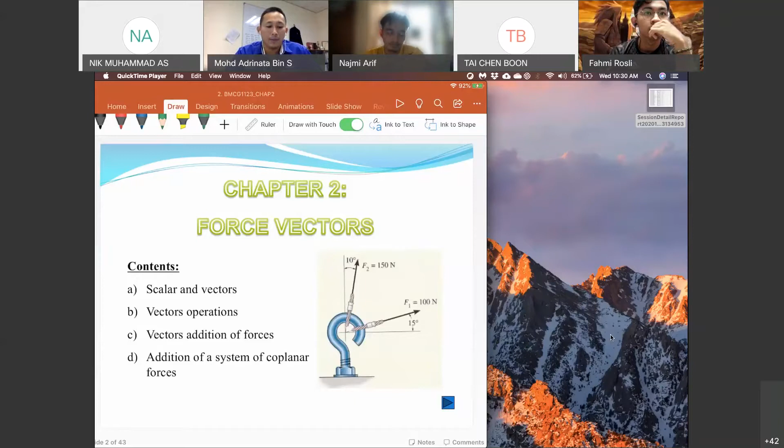Okay. Application of vector addition. You need to add the forces. Okay, there are 4 concurrent cable forces acting on the bracket. So this is our bracket. So this is 1, this is 2, 3, and 4. There are 4 concurrent cables. So there are 4 cables acting on the bracket.

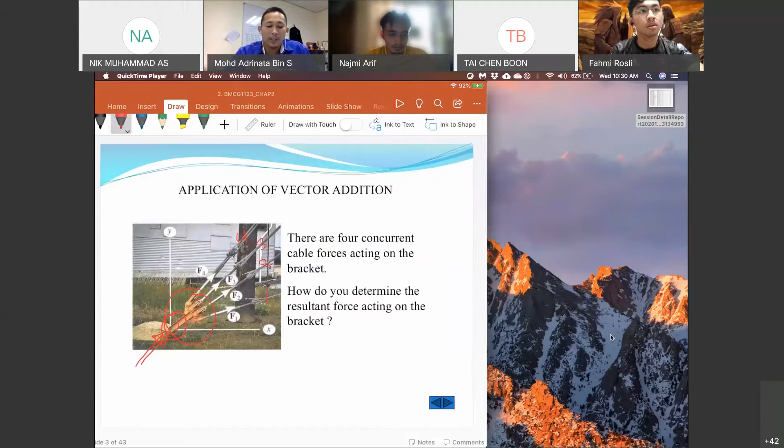How do you determine the resultant force acting on the bracket? So what happened here? What happened to the end of the bracket? So you need to calculate what is the force reaction at the end of the bracket.

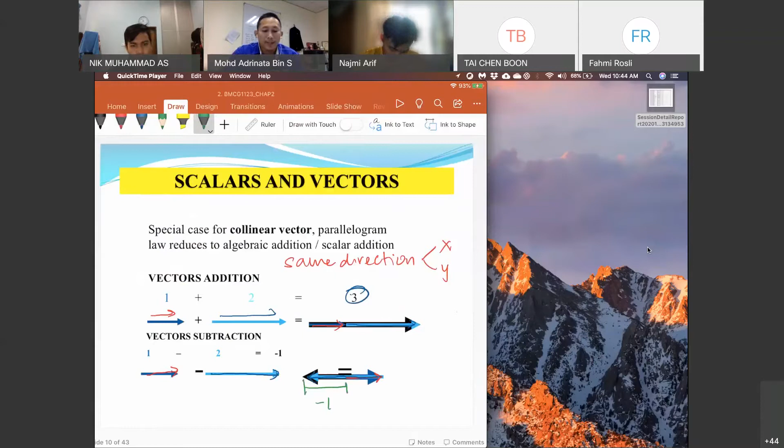Okay, adding, subtraction. Okay, so for vector subtraction, we will look at vector subtraction. Before this, you have A and B with a positive direction, but what if you have A minus B? Okay, so if you have A minus B, then you need to use this as the negative direction. A minus B. So at the end of tail A, minus B. So this is the resultant force. Okay. Any question?

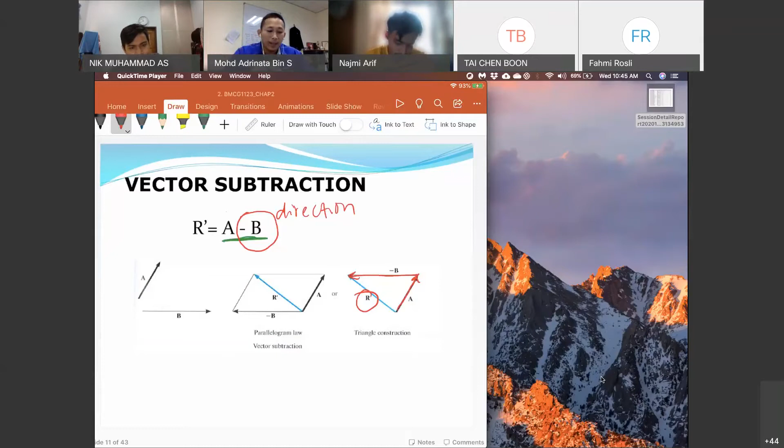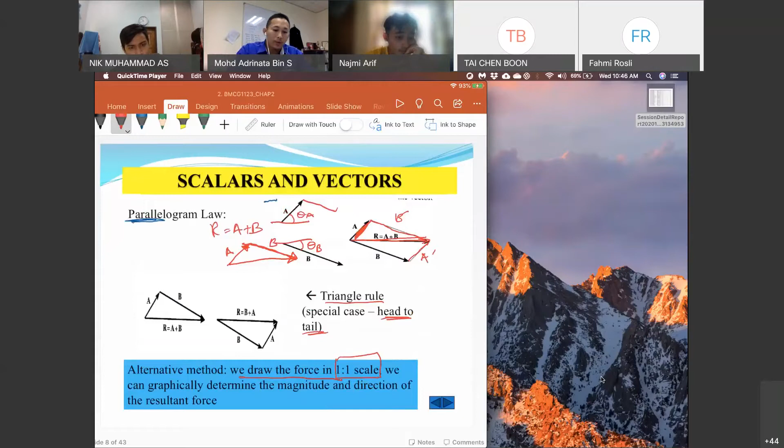Vector addition of forces. So this one is easy, parallelogram, and then you can use addition with head to tail. Okay, this one, head to tail. Okay, so head to tail. So this is the first strategy. Vector addition of forces, finding resultant forces.

Two component forces acting on a point can be added together to form resultant forces. Two components acting on a point can be added together. So this is like A, B, this is a point, can be added together to form a resultant. Just now using parallelogram, okay, using parallelogram. So this is the resultant. Okay.

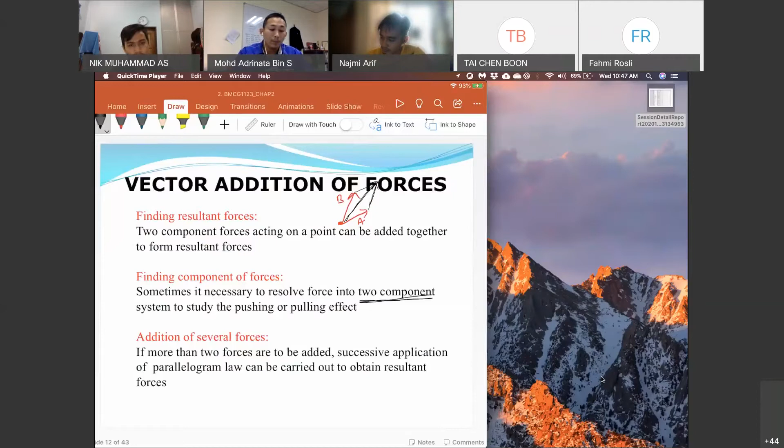Finding components of forces. Sometimes it is necessary to resolve a force into two components to study the pushing or pulling effect. So this one is divided into two components. Addition of several forces. If more than two forces are to be added, successive application of the parallelogram law can be carried out to obtain the resultant force. So this is a parallelogram. Resolution of a vector is breaking up a vector into components. So you need to break it, divide it into two components. It is kind of like using the parallelogram law in reverse, also known as finding components of forces.

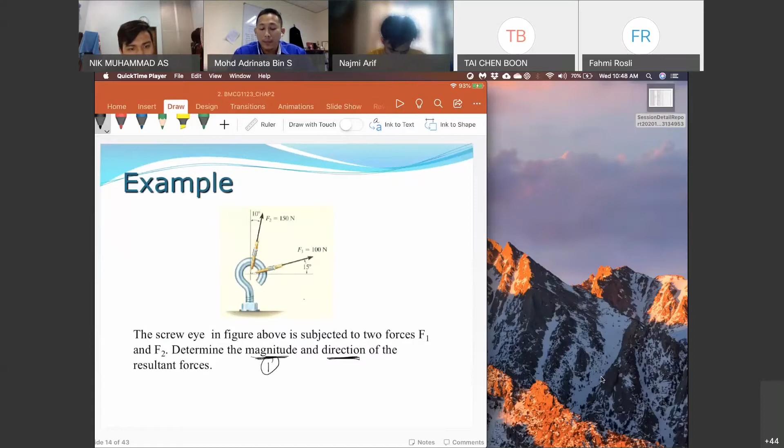Magnitude, 1 mark. Magnitude is the value of adding 100 plus 150, but it is not easy like that. You need to break it into X and Y axis and so on using the steps. Direction, 1 mark, so direction should be in theta. Value, magnitude, forces using Newton. So this is what you need to remember. There are two things in your results you need to mention: Newton and theta. Okay, both.

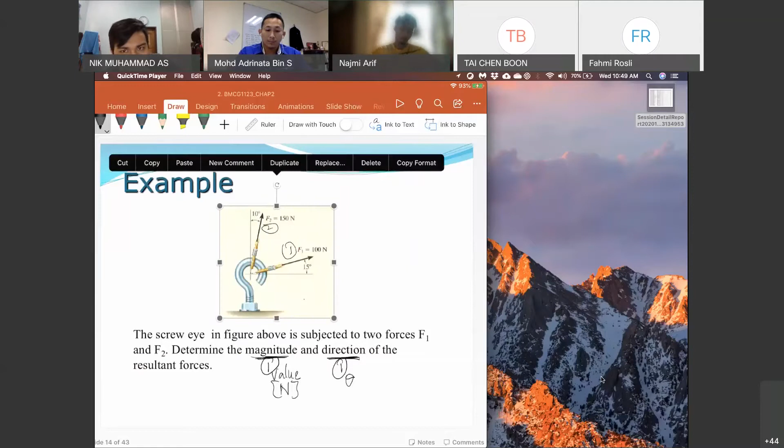Okay, so how are we going to solve this problem using our parallelogram? Draw a line from head of F1. This is F1, number 1. This is F2, number 2. With theta 15 degrees, F2 10 degrees. So, okay, draw a line from head of F1 that is parallel to F2. Draw another line from head of F2 that is parallel to F1. The resultant force extends to where the lines intersect at point A.

So for the parallelogram, they ask: from head of F1, draw F2. From head of F2, draw F1. So let's say like that. The resultant force Fr extends to where the lines intersect. Intersect means meet, here. Need to find the magnitude of Fr and the angle direction. This is what I said: number 1, 1 mark, number 2, 2 marks. What is the value of the magnitude, and then what is the value of theta?

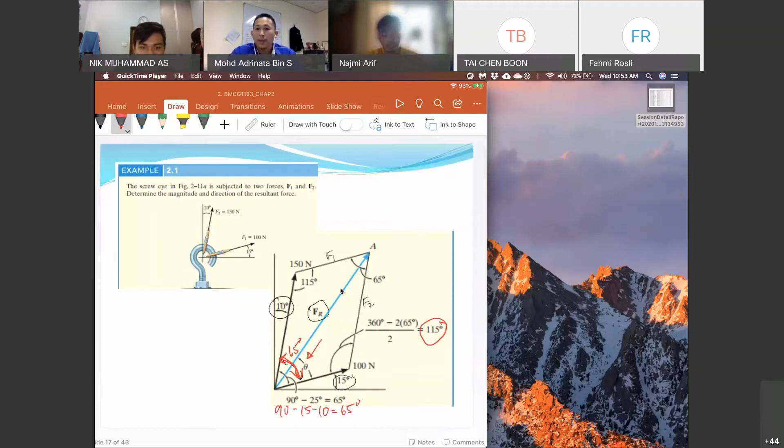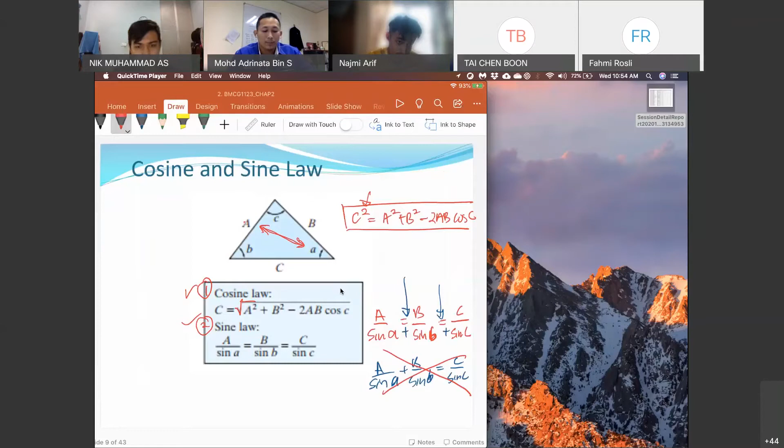So you need to calculate the resultant force Fr. Cosine law: A, B, C. Then we have the theta, which is opposite in the triangle. We have A squared equals B squared plus C squared minus 2BC cosine A. So you need to define which is A, which is B, which is C. That is how you define your triangle. This one should be A, this one should be C, this one should be B. Then you can solve this one. This is cosine law.

Okay, so from the calculation and from the triangle, we get that our resultant force is 213 Newton. It shows that our force 100 cannot be added to 150 to give a resultant force of 250. It cannot be like that. You need to find your triangle, find your theta, then you can get your resultant force. And then you need to find theta. B is theta, phi is from the x direction.

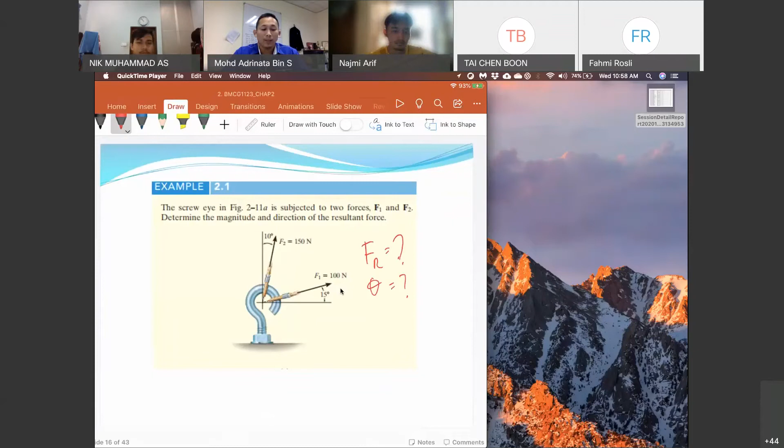If the magnitude of the resultant force is to be 500 Newton. This is a normal question. In our class we teach you: if we have 100 Newton F1, 150 Newton F2, what is Fr and what is theta? But in this question, we give you Fr. What is F? Fr is 500 Newton, directed along the positive y-axis. So theta is 90 degrees. Determine the magnitude of force F and its direction theta. So find F and find theta.

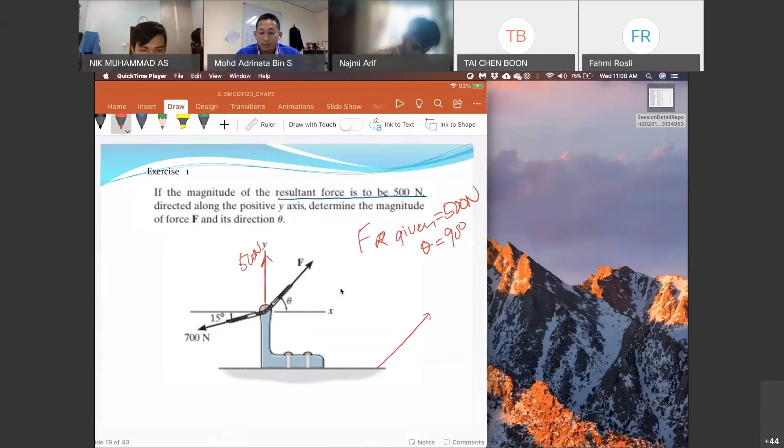So from the parallelogram, you can draw this one, F. F is actually unknown. But you have your 500 Newton, this is Fr, and then you have 700 Newton with 15 degrees. So you need to find your F and then you need to find your theta using your parallelogram.

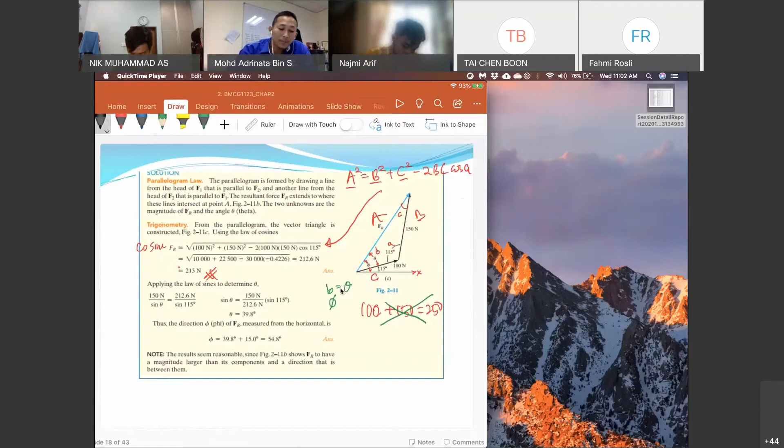Okay. So this is parallelogram. So I hope that you can do it by yourself. Then we have our next example. So we need to do step 1 and 2, or 1 is enough as long as C can be found. 1 is enough if you can get your C. Okay, 1 is enough. This one, this is the additional if you want to find another in the questions. You need to find more.

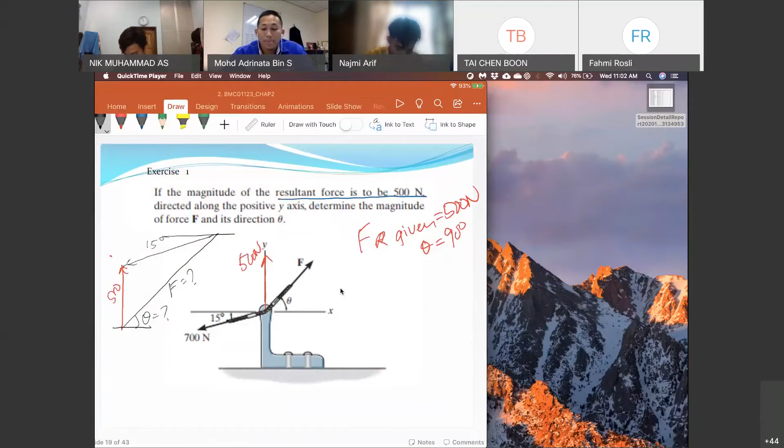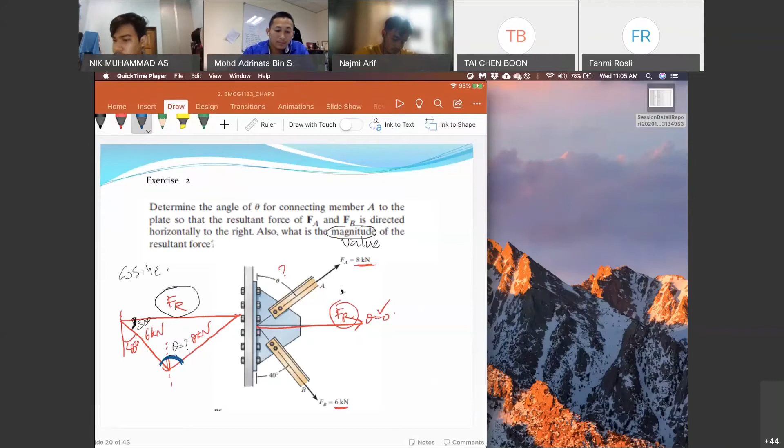Then after you get FR, you can calculate your theta, this one, using sine law. Okay. This is the answer given. FR you got 10.4 kilonewton. Using this method, you got your FR resultant force is 10.4 kilonewton, and also theta is 54.9 degree. Okay, if you are using sine law, you will got this theta. I say it phi. Let's say this one is phi is equals to 94.9. Okay, this is what I said yesterday.

You need to use your trigonometry knowledge. You need to deduct this one. This one is the same, 40 degree. Okay, so you need this answer. You need this theta. If you answer theta is equal to 94.9, wrong. Okay, so be very careful when you answer, and please check it back after you solve the questions. Okay. So for this parallelogram, you need to use cosine law, you need to use sine law, and you need to understand how do we transfer the angle, the theta. Okay.

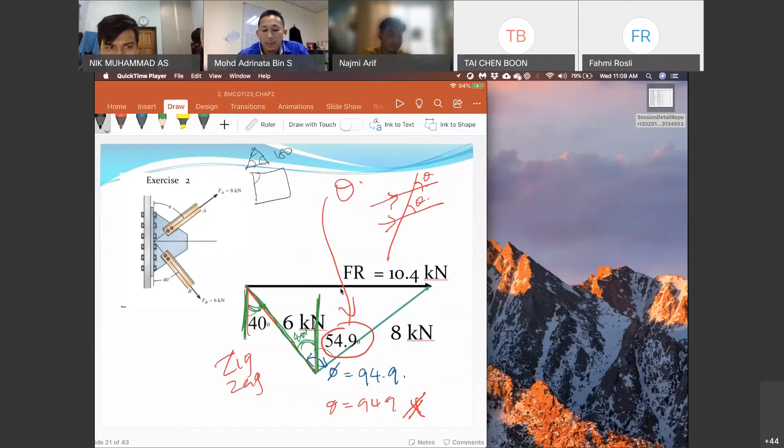So this is, I call it as a zigzag, this one, zigzag. Okay, to transfer 40. This is parallel. So this one is the same. So theta is the same theta. So sometimes you need to use this one also. Okay, and sometimes you need to calculate there are triangle. What is the total angle of the triangle? Total internal angle. So A plus B plus C equals to 180. Okay, for square, A, B, C, D is equals to 360.

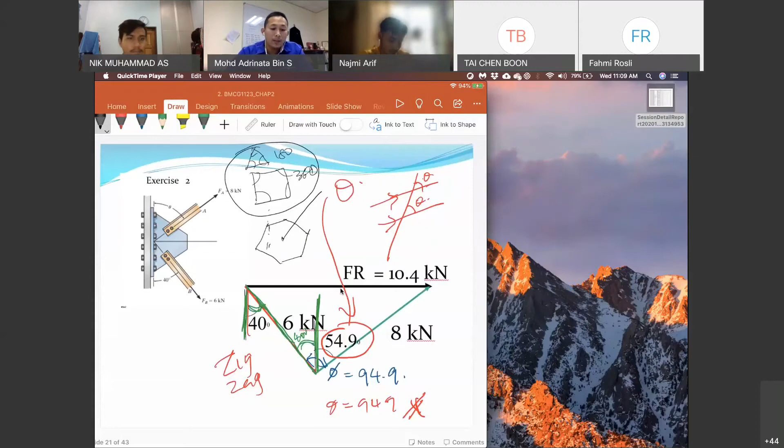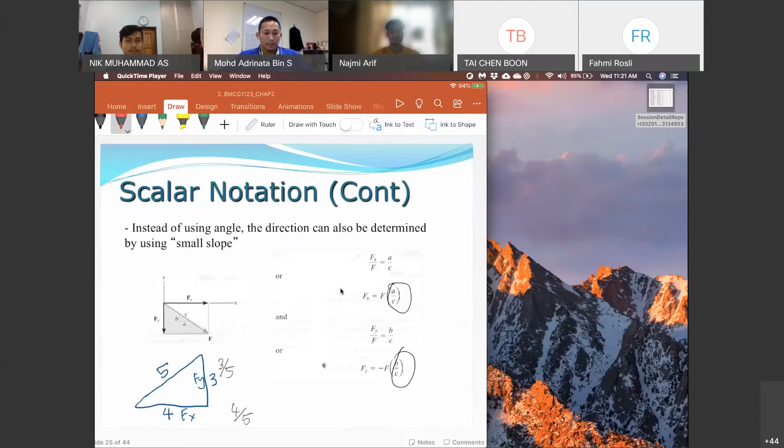Now, I'm explaining Cartesian vector. Okay, we have Cartesian vector, and then we have the examples. Cartesian vector: we resolve vectors into components using x and y axis. It's the same, x and y axis. Each component of the vector is shown as a magnitude and a direction, without using theta. So the direction is based on the x and y axis. We use the unit vectors i and j. Okay, so i for x, j for y.

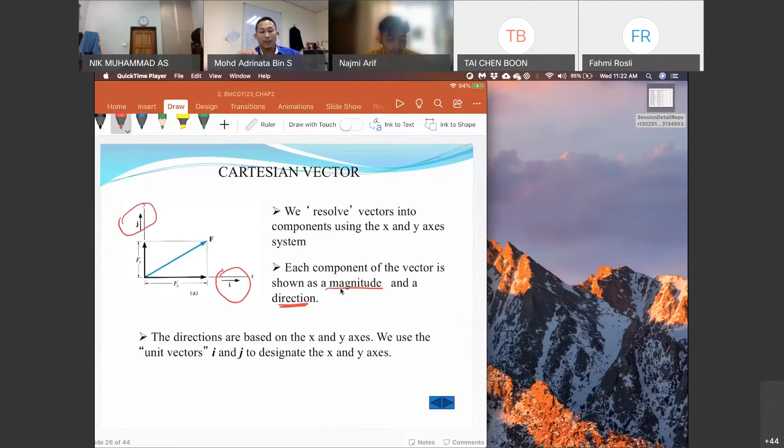This is the example of Cartesian vector, which is the resultant force that you have given. Before this, from the questions, you have F1 equals to 100 Newton with theta is 15 degree. Instead of mentioning F1 is 100 Newton with theta, they write it as F1 equals to, let's say this one is 95 in I direction, this one is 10 in J direction. So you need to calculate actually, but I just use an example. So F1 is equals to 95I plus 10J. Instead of giving you 100 Newton with theta, they can write it as 95I plus 10J. So you actually need to find the F1 and also the theta.

It's the same. So the X and Y axes are always perpendicular to each other. Together they can be directed at any inclination, so you can move the origin. You can move the origin to answer depends on your question. Sometimes the question is moving downward of the slope, so you can change your X and Y direction using theta of the slope. So this is origin and this is the same origin, but you need to make sure that X and Y is perpendicular. What is perpendicular? 90 degree. Always 90 degree X and Y.

So before this, we have our parallelogram, and then we have our trigonometry, Fx cos theta, Fy sin theta, and then now we have Cartesian coordinates.

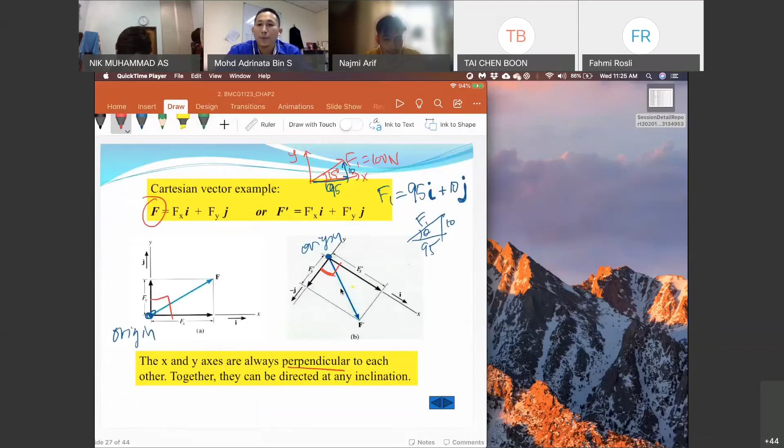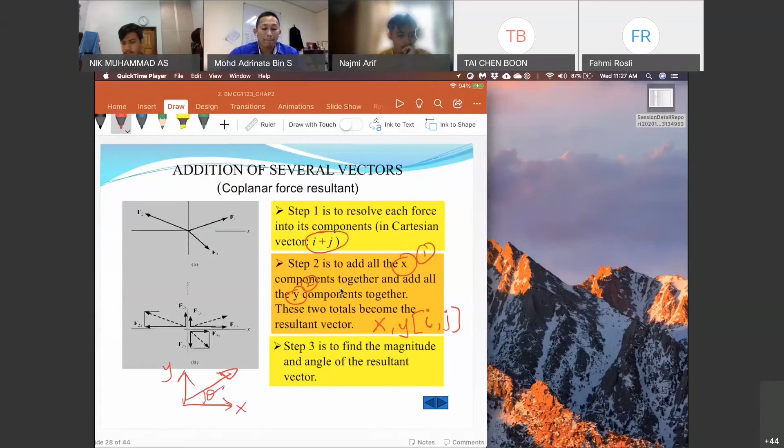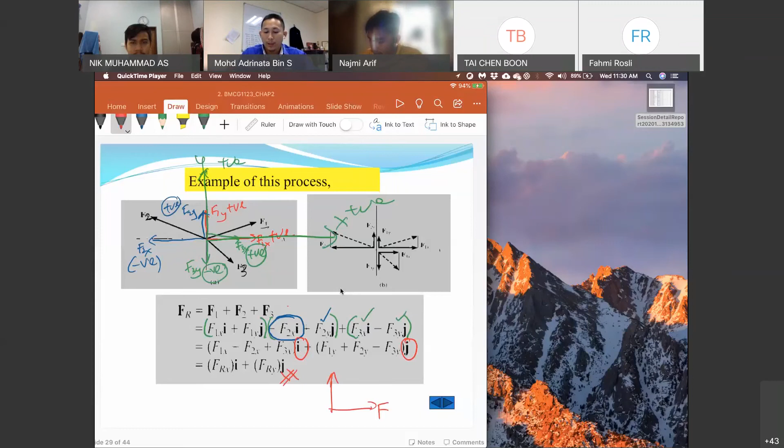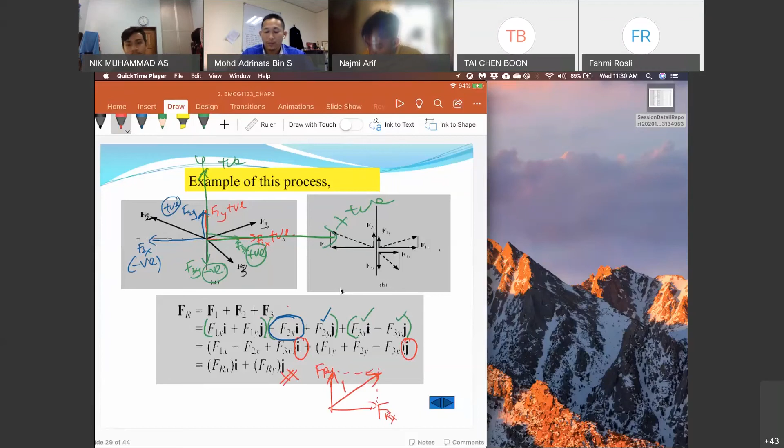Example of this process. So we use an example of F1, F2, and F3. We choose F2. This is F1, this is F3, this is F2. So for F1, you can divide it F1X plus F1Y. Then for F2, F2X, F2Y. And then you have F3, F3X and F3Y. So you have divided for X and Y, X and Y, X and Y. 1, 2, and 3. But please have a look at this one. Okay, so F2 in X direction. So we have F1X, this one is positive direction. F1Y is in positive direction. And then we have our F2X in negative direction, so this one is negative direction. F2Y is in positive direction. Then F3X in positive, and F3Y, this one is negative direction. Because of X and Y, this one X is positive, this one Y is positive. So we are using that positive and negative sign of XY. Then after that we combine for I and J, add them together, and this is the answer for Cartesian coordinates. And then from there you need to draw FRX, FRY, so then you need to find the resultant force. That is the example of Cartesian coordinates.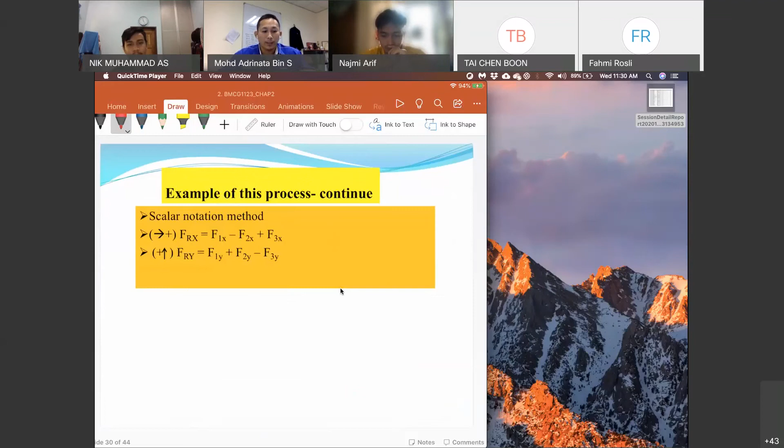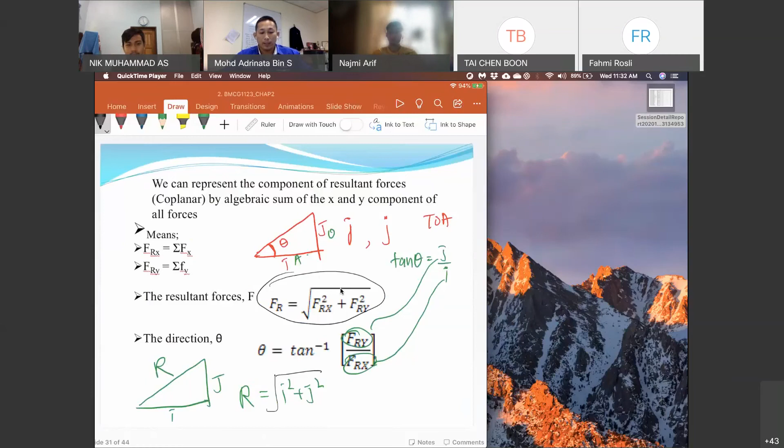So you now know the scalar and also the Cartesian coordinates. And then from that you have I and J that give you the resultant, this is I, this is J. Then you need to find your theta. Theta is TOA. If you have opposite, this one is opposite and this one is adjacent, so it should be tangent theta equals to J over I. J over I is Fy over Fx. So the resultant force is R square equals to I square plus J square. So R is equals to square root of I square plus J square. So it's the same, this one is just using FRX, FRY, the simple trigonometry. Then you can find the theta, it is something like this one. It's the same.